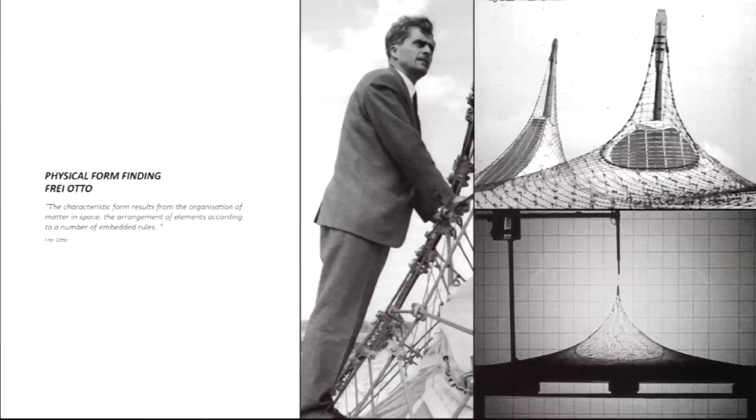We're looking into computational design strategies that allow us to integrate the fabrication of structures from the very beginning into the design process. So there's a certain legacy, a historic precedent of that in Stuttgart. Most of you know Frei Otto. The interesting thing here is, for example, the relation between such a cable net and a soap film bubble.

So that's the general approach that we focus on very much in our design strategies, that form is emerging through a set of boundary conditions and is not drawn by the designer and later on implemented with various methods that might or might not be suitable to achieve that specific form. So this shape is not drawn, but it really emerges through a set of material properties. So that's very different from how architecture is often constructed.

Often you have a serial production, industrial production of identical parts, which are then added together, and that's quite different from how structures and form are developed in natural structures. Natural morphogenesis, so the development of form and growth of material in response to its external and internal stimuli, allows such a structural system, for example, to be very locally differentiated and respond to its local requirements, which in the end allows a lot of material savings and also a very interesting degree of functional integration into these structures. So we're looking into a way how those properties can be transferred into architectural structures.

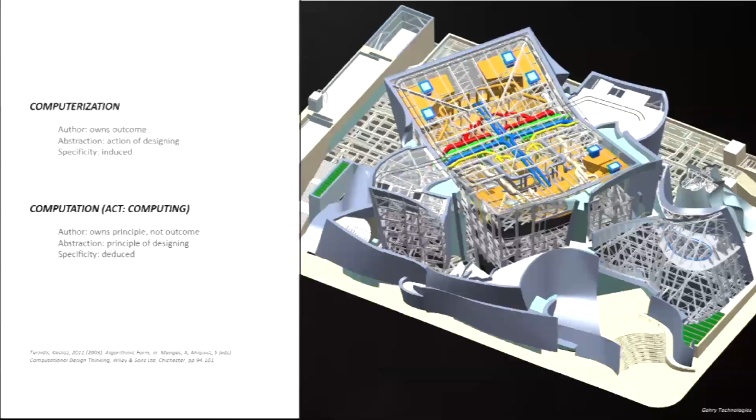And the interesting thing here is how computational design strategies are suitable to go from this natural morphogenesis towards a computational morphogenesis of form that integrates fabrication aspects from the very beginning. There's a small distinction that is important to make. So we're not just merely automating or computerizing tasks, but we use our computational design tools as explorative and generative methods to come up with novel solutions. That requires a very integrated design approach. So computation, simulation, and fabrication are simultaneously integrated into the design method.

Furthermore, computational design strategies are also very suitable to be the point of confluence within a multidisciplinary undertaking. So working together with biologists, engineers, material scientists, a computational design tool allows you to integrate a lot of these inputs from adjacent disciplines into the design process.

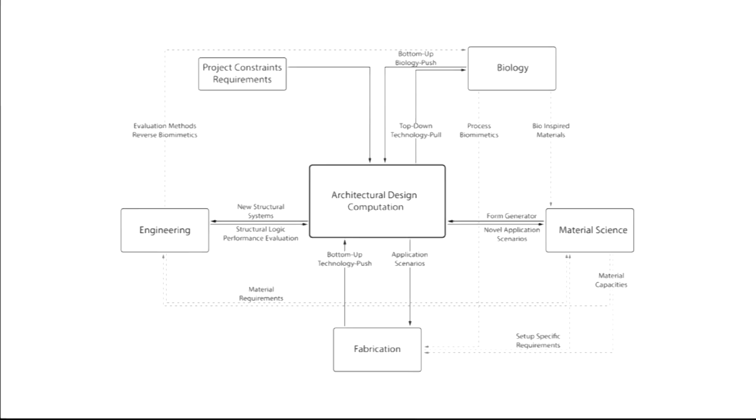We work on a one-to-one scale, so we often test the design and fabrication strategies that we develop in a full-scale prototype. So here you see some of our research pavilions. Pavilions are an interesting method of testing this research because on the one hand it's full scale, so you see if the detail, the connection and the scaling of the structural principle work out. On the other hand, you can leave away a lot of requirements you usually have for architecture, which allows you to focus and foreground a specific research interest.

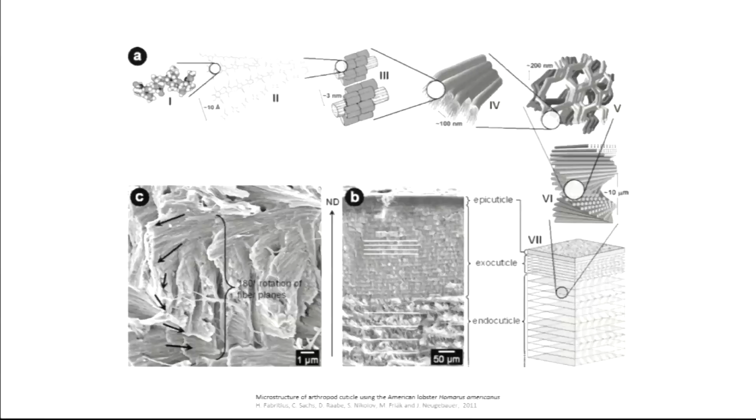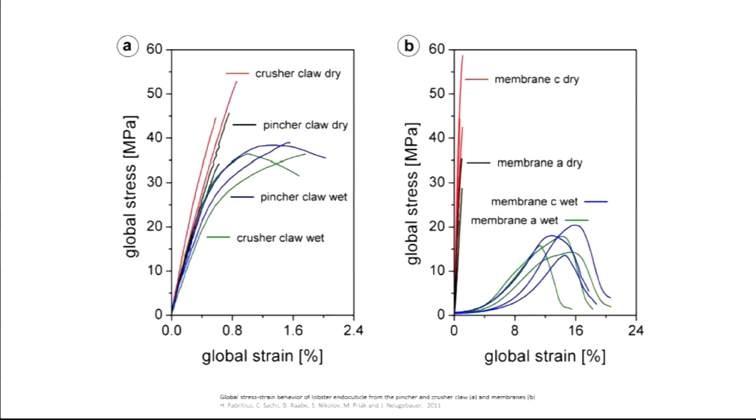Often we start our investigations with natural structures. What you see here is a pincher claw of a lobster. One thing that we're interested in is how this complex form emerges to meet the structural requirements. But the second layer that we're interested in is a specific material layup. So nature often uses fiber composite materials, which use the anisotropic character of the fibers to differentiate their structural behavior. You can use the same material of fibers and arrange it in various ways, and for example in the lobster generate very soft parts of the skin and very rigid parts just by changing the material organization.

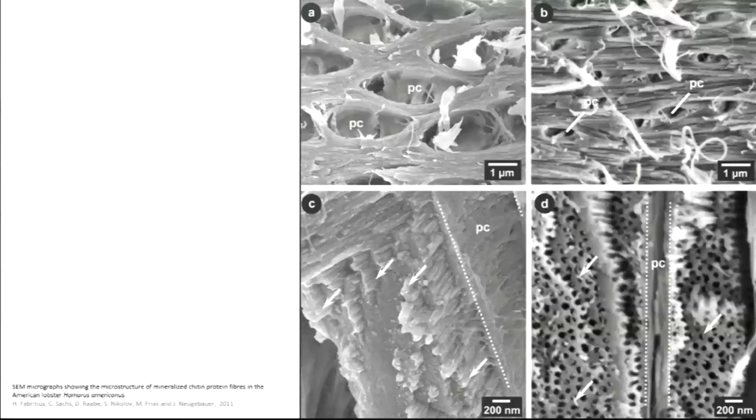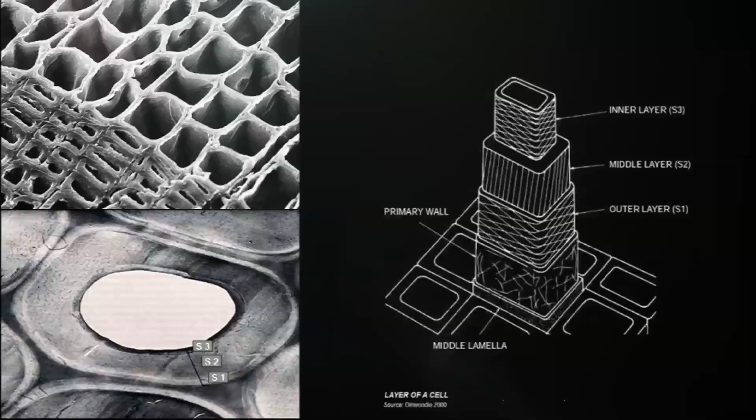And furthermore, what I mentioned before, functional integration. So this is not only a very material efficient structure, but it also negotiates the internal and external climate, gas exchange, liquid transportation, and so forth. That's a general principle in nature. So wood is similarly built. Tension and compression wood have different fiber orientations.

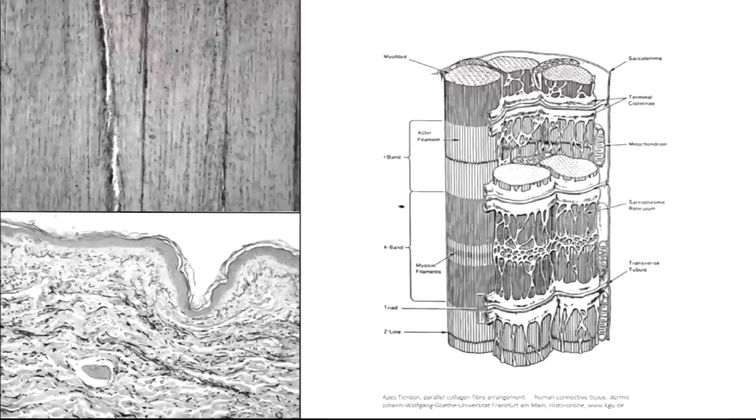Or even within our bodies, for example, collagen fibers are used. And depending on how you arrange them, you either get a soft connective tissue or a tendon, which has very different material properties. But it's the same material, just organized in a different way. So what does that mean for the architectural design process?

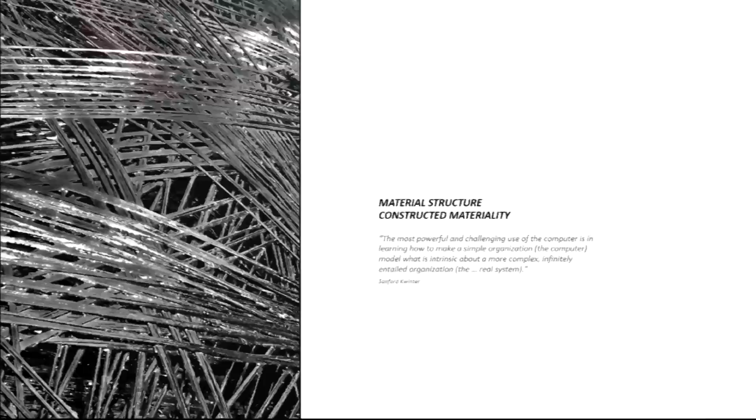That means once we can reach down to the level of the material with our design process, we can have what we call a constructed materiality. So during aligning the fibers in the structure, the material layup is already defining the structural system that we can generate.

So the question is how these structural principles and that potential that we see in natural structures can be transferred into technical applications. For that, we use materials that are already used since quite a while in high-performance applications like aerospace, for example. We have fibers like glass fiber or carbon fiber that are embedded in a polymer matrix.

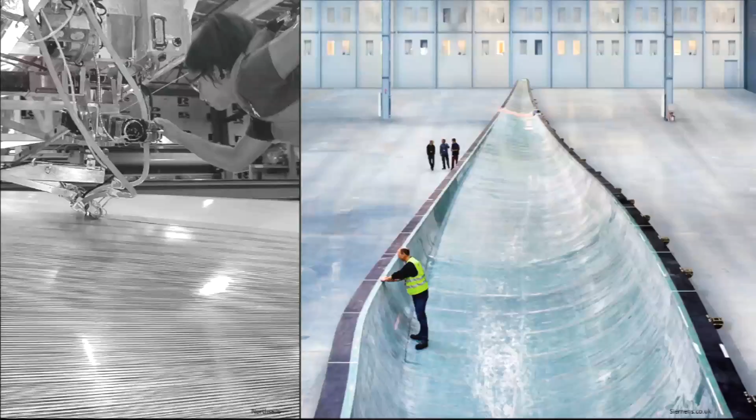The question is how these can be transferred in the architectural construction industry, because the methods used in other industries so far use the material that is actually quite formable and therefore very suitable to implement these biological geometries that we saw before, these performative morphologies. But in industry so far, a costly formwork is required, which means you have high cost to produce the one mold, and therefore it bounds the formable material back again into a serial production logic.

So for architecture, where we often have unique pieces, and especially when we want to take this differentiated structure from natural inspirations to have more material saving and locally adapted structures, we have unique parts. So we need to come up with novel fabrication strategies to enable the usage of these materials in architecture.

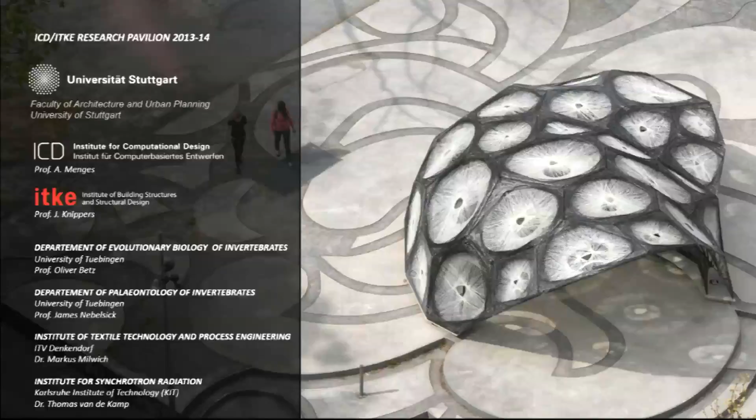So I'm going to show a row of projects that I've been working on at the Institute. For this project, we collaborated with a row of various institutes. Most important is the Institute for Structural Design with Professor Knippers, who are doing all the simulations for the structural behavior of these prototypes. And we have industry support and work together with our master students on these projects.

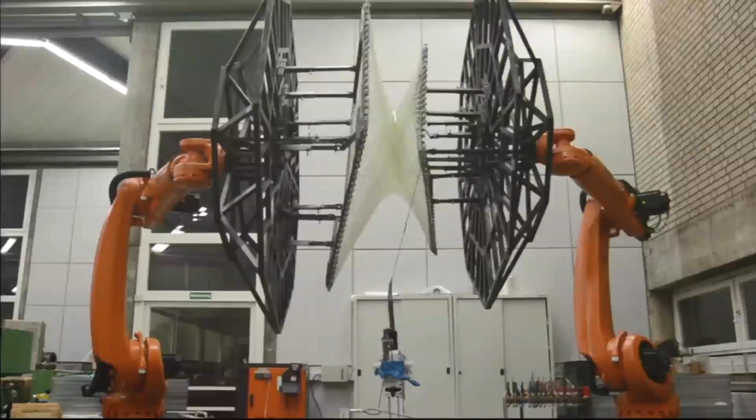What you see here is a fabrication technology that we developed, which is robotic filament winding. And what is important is that it's a coreless winding technique. So the steel frames you see are reconfigurable, so they can adjust to various building component geometries. And the fiber layout can be individually programmed by programming the robot movements.

What you see is that there's no mold between the two frames, which means the curvature that you see in this piece, for example, is emerging through the interaction of the fibers pressing onto each other, which you can fine-tune through the order how you apply these fibers. That means that we don't need to produce a costly formwork for this piece, but can really produce one-off components with the same fabrication setup.

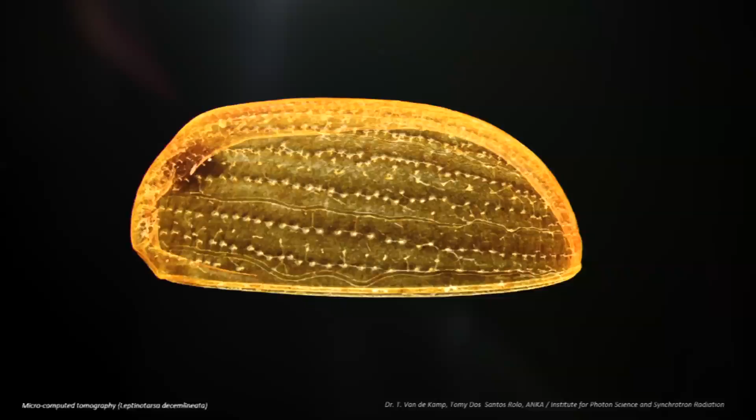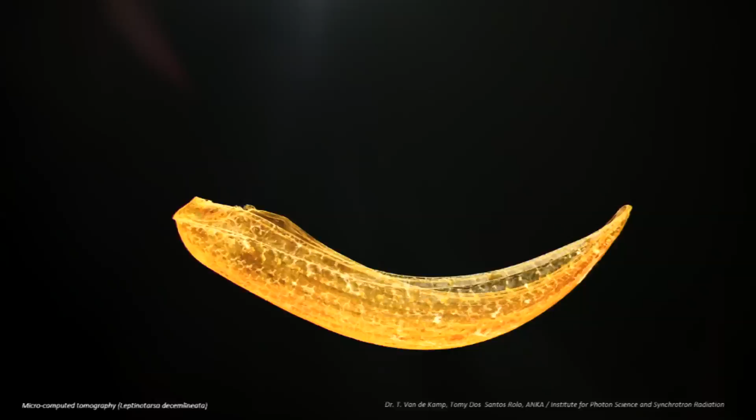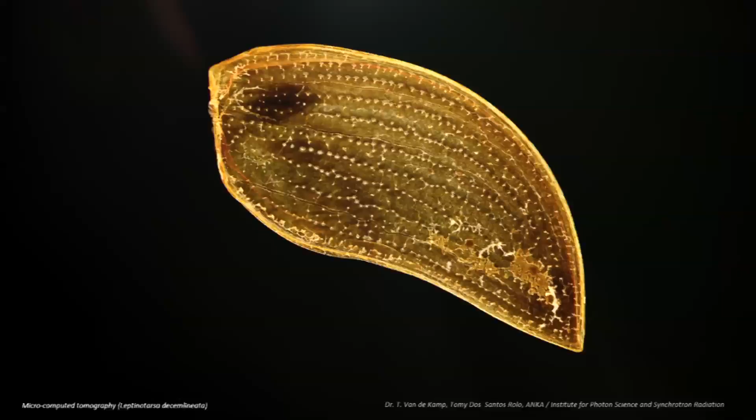The biological role model here for this investigation were beetle shells that we scanned in collaboration with scientists from Karlsruhe Institute of Technology. And very important when you look into these biological structures is you see incredibly complex structure, and you always need to have a comparative study of various role models to see what is actually the underlying functional principle that needs to be abstracted and can then be transferred into architectural applications. It doesn't make much sense to just reproduce what you see here.

So what we were interested in, when we had a closer look in electron microscopy scans, is on the one hand the geometry. So how are the elements shaped to be really suitable for this load transfer, and how are the fibers arranged in these beetle wings? And then I mentioned before the natural process of morphogenesis.

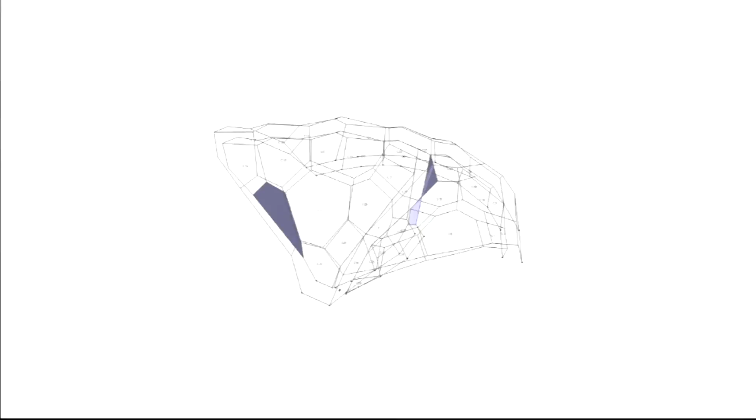We took all these principles and integrated them into an algorithm to come up with a computational morphogenesis. So here again, the form is not designed and drawn by a designer. We rather define boundary conditions, and the form is emerging to negotiate multiple parameters. For example, the fabricatability on the robotic setup, which has certain constraints to the size of the element, the material behavior is integrated, and the structural capacity is adjusting the individual elements.

So once we have this global morphology of our components, there's another algorithm defining the order in which the fibers need to be applied to the system. So what that allowed us is to fabricate individualized building components, which each have an individual geometry and a unique fiber layout to have the most material efficient structure in the end.

What sounds more like a technical task is in the end also very interesting from the perspective of a designer and an architect, because the material characteristic is very much articulated here. So composites are already used, as I said before, in other industries, but often you just see slick surfaces and you don't know if there's a metal or a composite underneath. Here the anisotropic characteristic of the fibers and the robotic filament winding process are really visible and articulated in the architectural design outcome in the end.

So the approach is quite different to the usual approach to architectural design. As I mentioned in the beginning, it's not the initial design of form and then a subsequent step to find a method how that could be built, but we integrate the fabrication process, the material characteristic from the very beginning and generate forms that we know can be fabricated. And through the novelty of the applied mechanisms, we also achieve very interesting design features in the end. You see how the glass fiber is transferring the light and the whole thing starts glowing at night, for example.

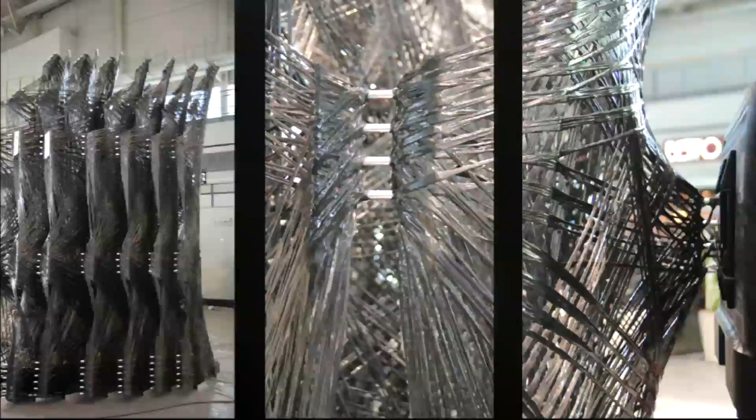So that allowed us to not go in a very experimental way, but to refine structures that we had developed before. So here you see that components are stackable. We increased the accuracy quite a bit, and we were able to increase the winding speed by a factor of 20, so we can produce these things super fast now. And those are really important steps to bring it closer to application in building industries, these refinements that need to be made before it's actually feasible to apply these strategies.

But again, that was not only a technical refinement; we maintained this articulation of the material characteristic. You see the fiber alignment and interesting features like the shadows that come with it.

This is a recent project that's currently shown in Stuttgart. It's again a very multidisciplinary undertaking with structural engineers. We had aerospace engineers involved, biologists, and machine engineers. So again, our master students from the ITECH master program were involved in the construction of this. And we got the material sponsors and the machines. For example, we have a really strong cooperation with KUKA, who are always lending us the right equipment for the projects.

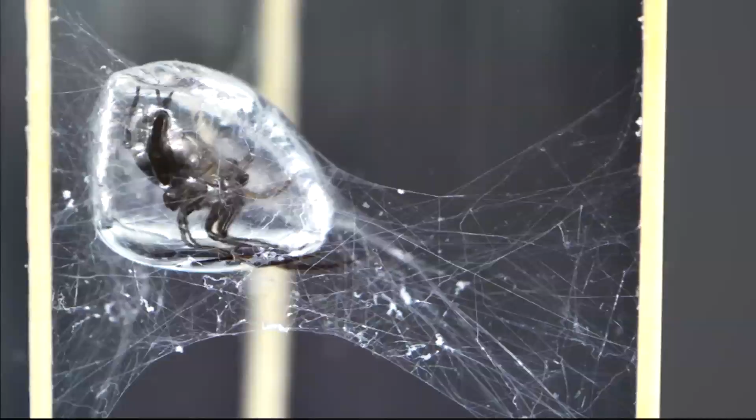Relating that to what I showed before, where we were looking into a final morphology of an outcome in biology, where we were transferring geometric features and material organization features into a very efficient lightweight structure. The approach was quite different at this project, where we were looking more into a behavioral model. So we were looking not into the final result, but into the process: how are fiber structures generated in nature. And one very interesting model that we found in collaboration with the biologists is the water spider.

So the water spider lives its entire life underwater and still needs an air bubble to breathe. The interesting thing is how a very complex fiber arrangement is generated without the need, for example, of a costly, elaborate formwork, linking it back to constraints that are currently coming from industry and interesting solutions that we can find in nature, how these things are resolved in a very integrated way.

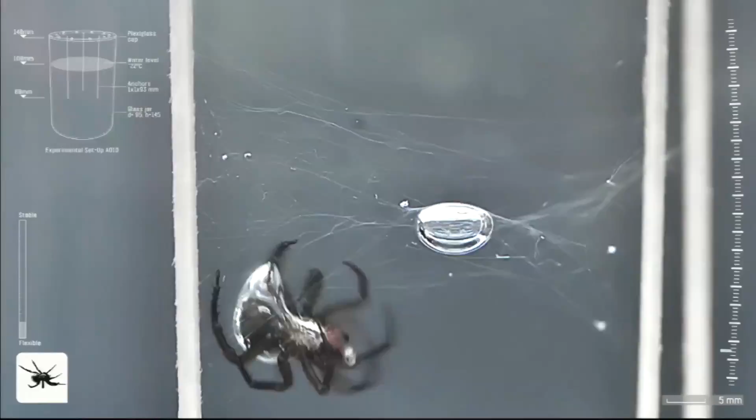So what we did, we got several of these spiders and had a setup in the basement where we were observing them building their nest. And it was interesting to see how in very different environments, so we were changing the supports it could connect to and applying some currents and seeing how robust the structure was, every time the robust set of instructions, the behavior that the spider was following, allowed it to build this rigid cocoon-like structure.

So there are very interesting aspects also, again, on the level of the material. How is that hierarchically differentiated? How are fibers bundling, spreading out? Which parts are reinforced? Which are held a little bit loosely to have a little bit more give? And all these features we were interested in then need to go through a special evaluation.

It's basically like a classical approach towards biomimetics, where we say, what are the features that we're interested in, because they address something that we currently have as an issue in technical applications; those processes in nature need to be understood, and then it's very important that one can abstract them. And you will find that a lot of these things later are not transferable. There are only several things that you can really understand. You can figure out that even the underlying abstract principle is really still interesting for you as a technological application. And then most importantly, that it can also be implemented with the means that we have nowadays.

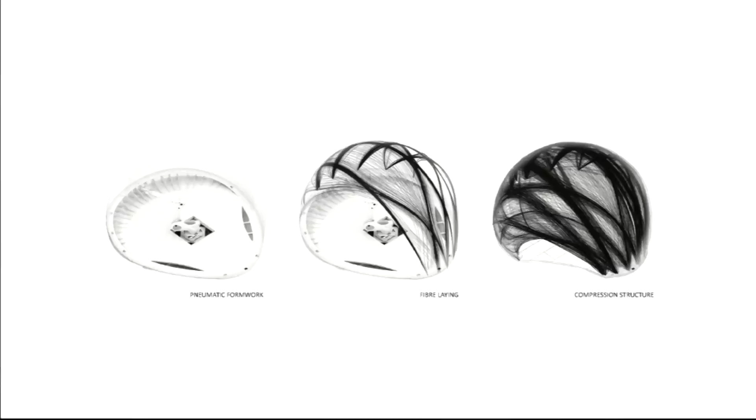And what we came up with is such kind of a setup that takes two aspects from the spider. The one is a very reduced formwork. So we had a pneumatically supported formwork here that, compared to the formwork you would usually need in industrial applications, is really very material efficient. It's just a very thin foil that's air supported and temporarily air supported.

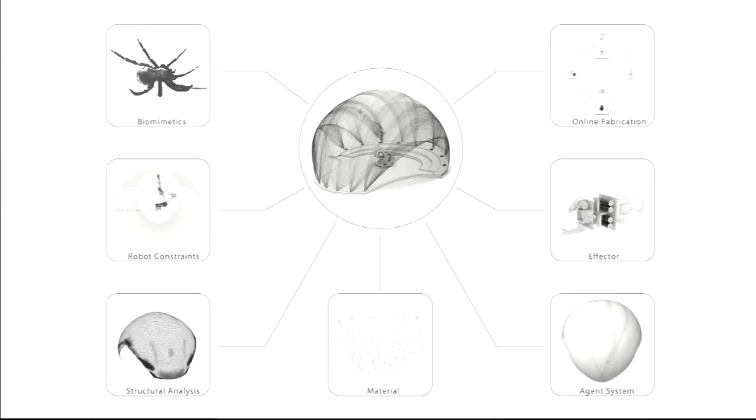And the second aspect that we were interested in is what I mentioned before, the behavior of the spider. So how does the spider determine where the next filament is to be laid? And that is, again, a very multidisciplinary undertaking where you need an integrated design approach, which is computationally supported. So there are fabrication constraints, structural constraints, and biological rules that need to be integrated into a design and fabrication system. For example, the robot has a certain reach that needs to be incorporated while generating the general shape of the prototype that we wanted to produce.

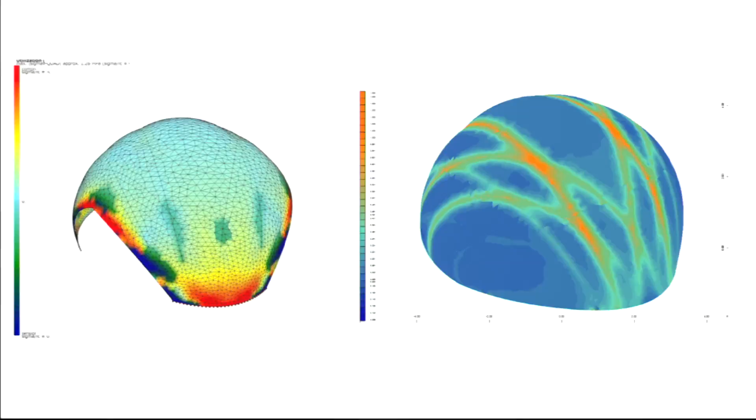In the second step, you see how that is structurally performing. And those are already two constraints that need to be negotiated. When you want to lay your fiber later, you need to know where that fiber should go to transport the forces that occur. On the other hand, the robot has certain constraints where it can reach better. So those things can be negotiated very nicely through a computational design system.

For example, here we chose an agent-based approach where you can imagine that a point is running across the surface and defining its path. The trace it leaves is basically a fiber that we want to place later. And the agent has a certain behavior similar to the spider. The spider always takes decisions where it should put the next fiber. Similarly does this agent-based model, where we define a layered system of behaviors.

And the interesting thing is that we can then weigh these. We can give a little bit more priority to the structural aspect or to the fabrication aspect and get a large variety of different outcomes of this behavioral design strategy. So in the end, it's not that the computer is taking the role of a designer, but it's actually resolving a lot of complex interrelations and gives us a lot of choices that we can then later follow.

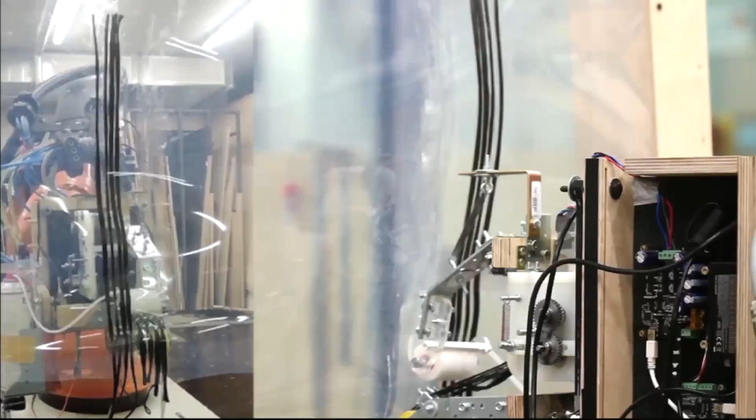Interesting architecturally here is also how it really differs from roof, wall, window topologies and has more gradients in structural distribution of the material. Here's the first test, how the robot is applying carbon fiber onto that ETFE film, and what you see is that it's deforming quite a lot. So it's not only a new approach from the computational design side that we're following in this project, but it also requires a different thinking for the robotic fabrication strategy.

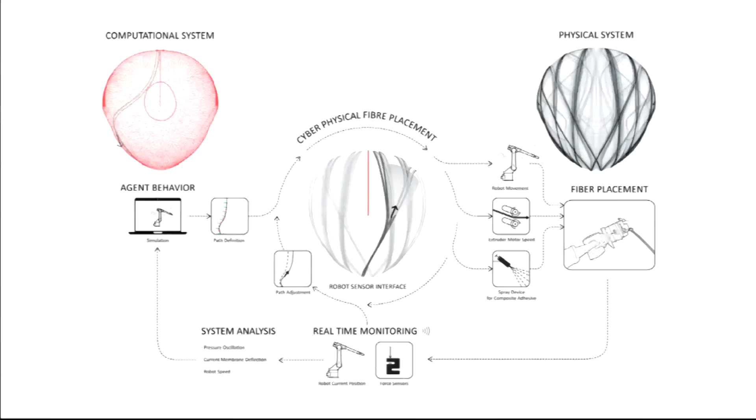Because before, the robot was only executing a program that we gave him. A lot of information was integrated into that program, but then the robot was just executing. Now we have a very dynamic fabrication scenario, which means the robot needs to be live reacting to the deformation of this formwork, for example. Amongst others, the amount of glue and the amount of fibers that are extruded were dynamic parameters that needed to be calibrated during fabrication. So that's something that is generally called a cyber-physical fabrication system, where there's a direct feedback between the physical and the digital.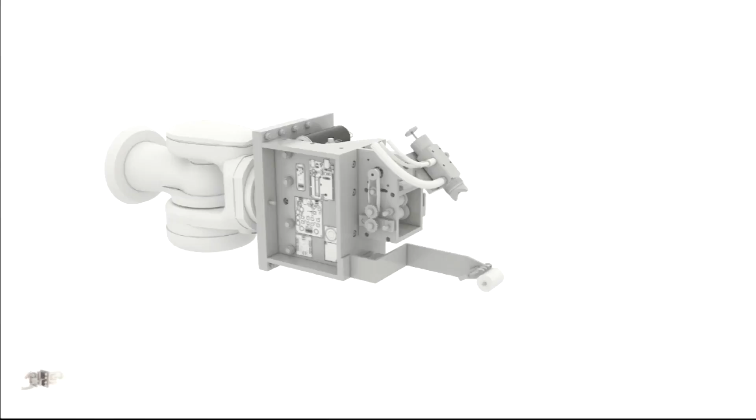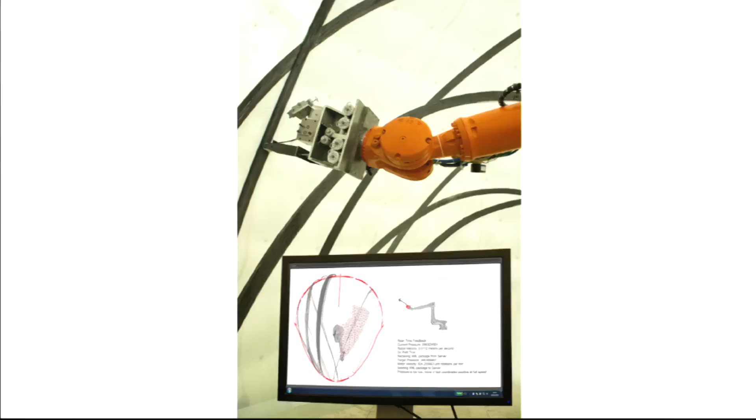That also includes the build-up of a very specific tool. So the robot is a generic arm that can be used for a variety of tasks unless we give it a specific purpose by designing our tool. That's also very important to mention in such an integrated design project, that designing your tool as an architect becomes a very important part in the design process. So it defines the design space that you're able to explore. And here you see how the digital and the physical are really fused together. While the robot is running, we have all the data, and the robot is live responding and reacting.

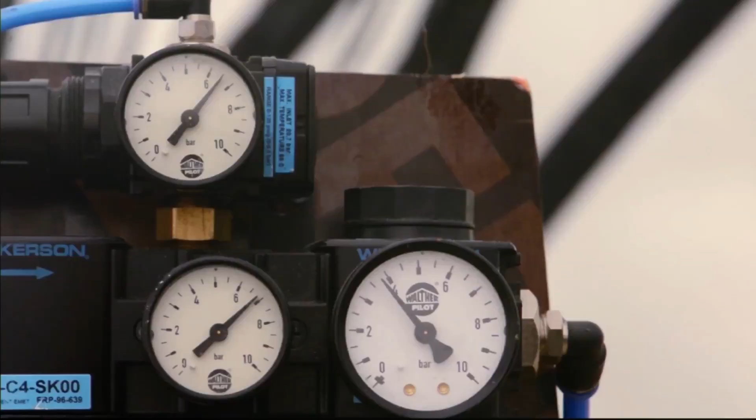Here you see how we inflate it, and then the robot was gluing the fibers from within the pneumatic formwork and creating this very dense fiber composite shell. Again, what is important is that this is not only a very interesting lightweight construction, so the construction weight of this is only 250 kilogram, and it's close to 50 square meters big, but it also has a lot of architectural qualities that can be explored. So it's not only a performative investigation of technology, but it's also about exploring material characteristics and seeing how that can be employed as a designer.